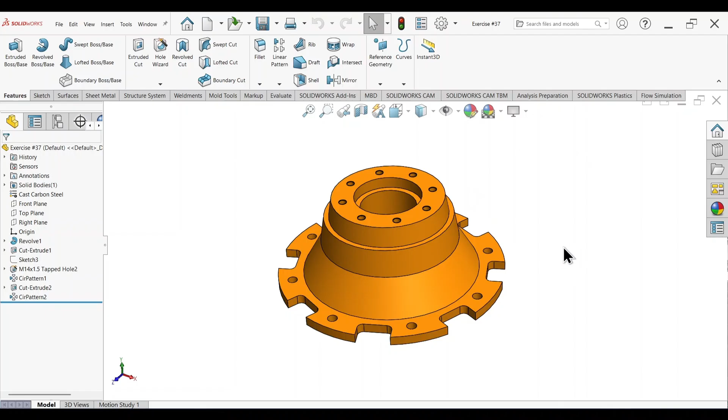Here we see the schematic drawing for exercise number 37. All dimensions are in millimeters. Here we see the isometric view, the top view, and the section view, taken along this horizontal line here, section AA. And we have a number of detail views, three in total.

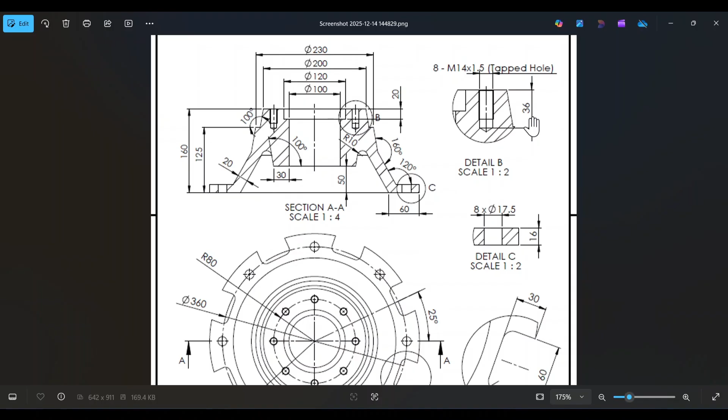For detail B, it showcases the details for the tapped hole at the top, showcasing all the dimensions. For detail C, we see the opening, or in fact the holes on the baseline of the component. And for detail D, it showcases the dimensions for this opening here at the bottom.

So we have a question here for this exercise, and it reads: what is the mass of this part in grams? It requires us to use ASTM A36 steel. By the end of this video, we're going to determine the mass of the part in grams. Before we actually determine the mass, and after designing the part according to the dimensions shown, we're going to have to assign a material of ASTM A36 steel.

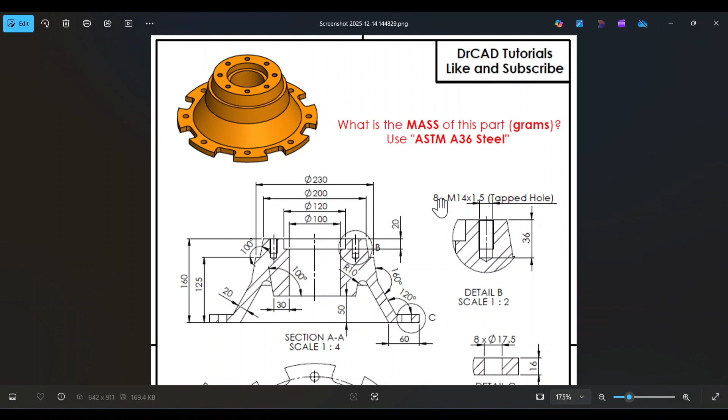So what are the main features for this component? Here we see that we have a base flange for this part. In addition, we have a central boss or hub. This central hub is both stepped and tapered, as shown here in the figure.

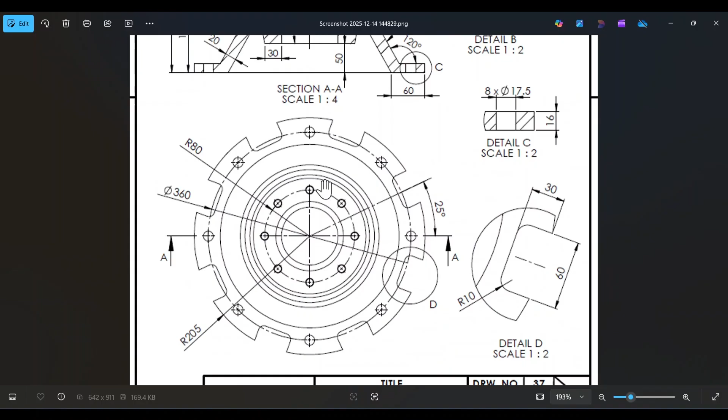We have 8 mounting holes. We can see this very clearly on the top view — 8 mounting holes on the base flange of the component. The dimensions for these mounting holes are showcased in detail C.

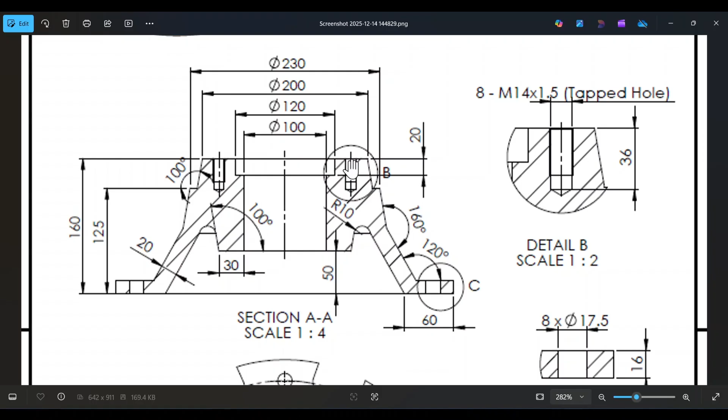And we have a section view, which is very important. To model this within SolidWorks, we're only going to use one 3D feature, and that is the Revolve Boss Base tool. So to model this very efficiently, we're going to sketch out the section profile. Since we have symmetry for the component along the y-axis, we're going to sketch out this profile right here using the line tool, and then fully define the sketch according to the dimensions shown. In drawing the sketch, we're automatically going to create the counterbore feature that runs along the center of the component.

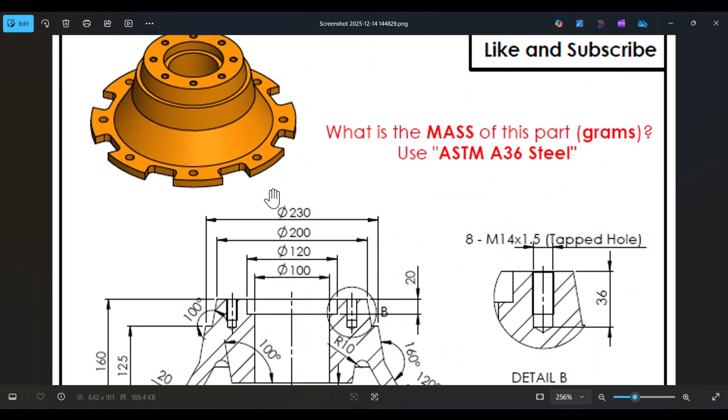After we sketch this profile and use the Revolve Boss Base tool to create the main body for the component, we're going to move on to the other steps, which is to create the mounting holes on the base flange, and we have to create these 8 tapped holes on the top surface of the component. For that, we're going to use the hole wizard in addition to the circular sketch pattern tool.

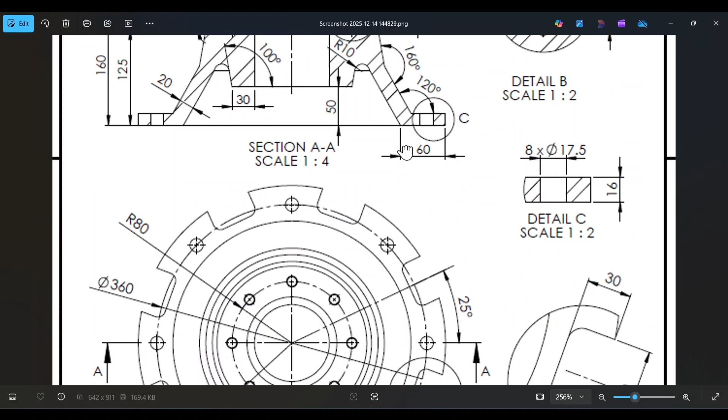Finally, we're going to work on creating this notch here, this opening, and for that we're only going to create one of it. We see here that this notch is situated on a center line that is 25 degrees with respect to the horizontal, and we have a number of dimensions here. So yeah, that's basically it.

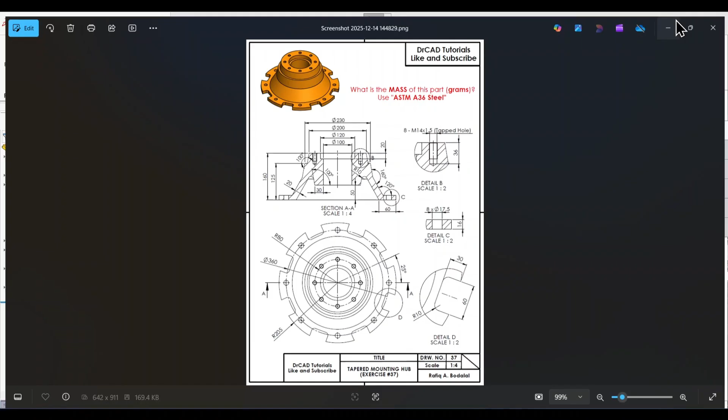So with that aside, let's get started with exercise number 37.

Okay, so let's start by creating a new SolidWorks part. We set the background to plain white, and we copy exercise number 37 into SolidWorks.

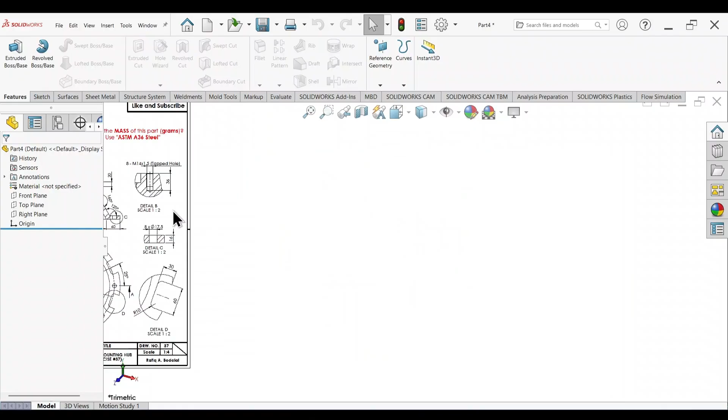As I said previously, the easiest way to model this within SolidWorks is to sketch out half of the section profile for the component, and then use the Revolve Boss Base tool to create the main body.

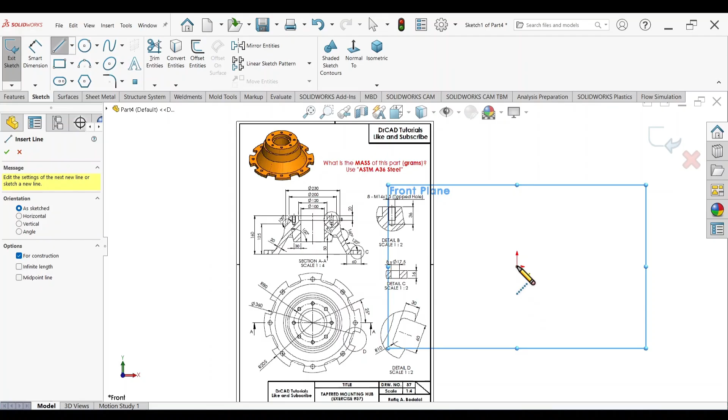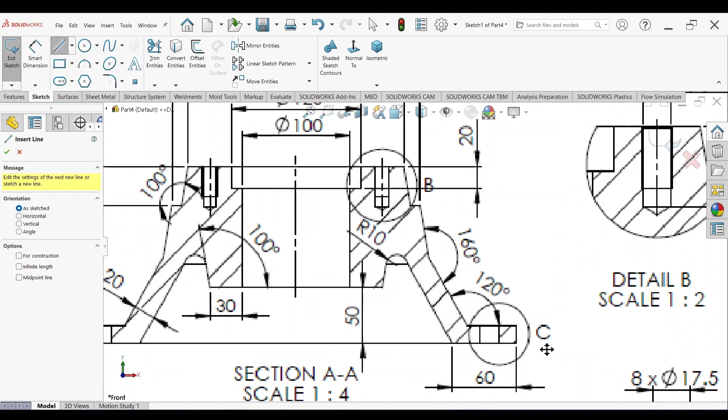Now what we need to do is select line and sketch out the profile, half of the section profile for the component. So let's go ahead and just sketch this out. I'm not doing anything fancy here, I'm just simply sketching out the lines here.

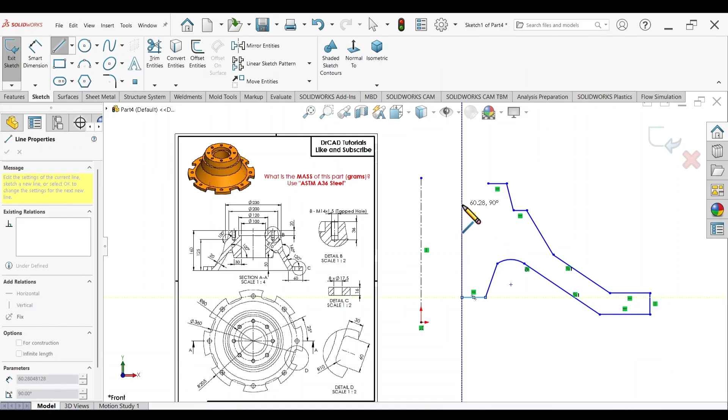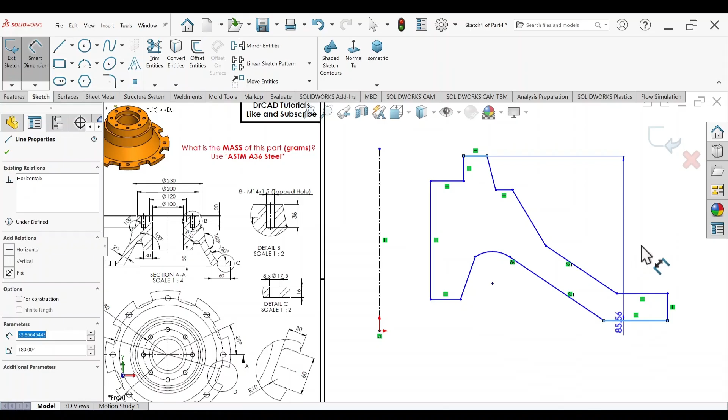Now we select Smart Dimension. Looking at the figure, the dimensions that define the sketch for the section profile show that the distance between this top edge and this bottom edge is 160 millimeters. Let's enlarge this image.

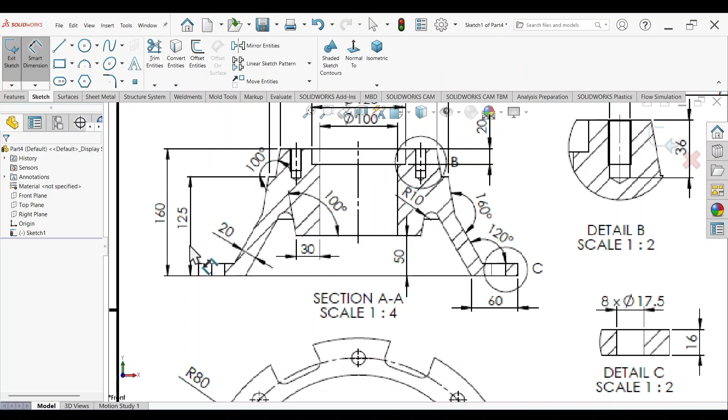Select Smart Dimension again. The distance between this edge and this bottom edge is 125. So the distance between this outer edge and this bottom edge should be 125.

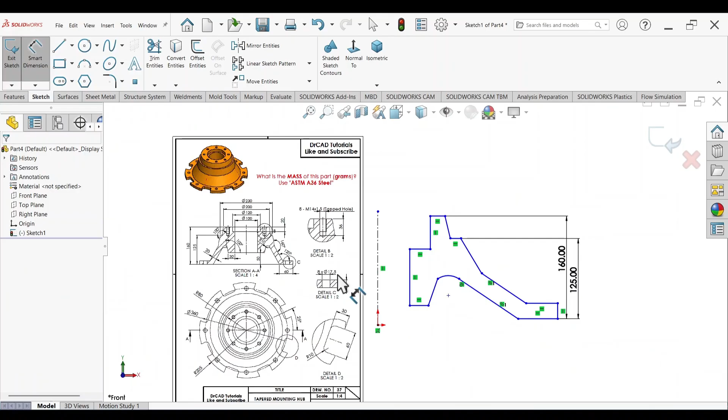Let's drag this downwards. Select Smart Dimension again, and the thickness of this edge should be 16. The distance between this line and this line should be 20 millimeters. The radius of the circle should be 10 millimeters. We need to drag this to the other side.

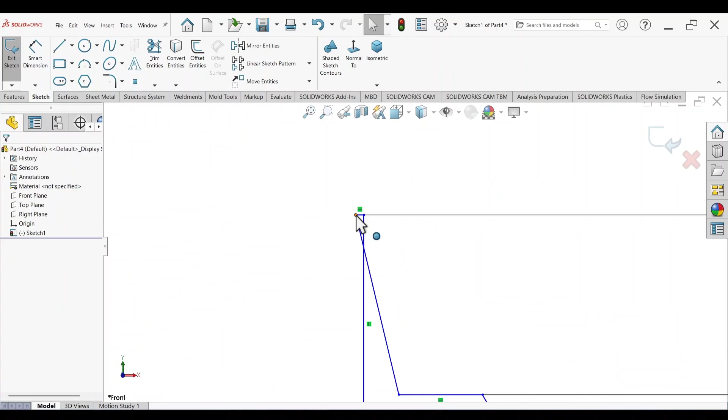Select Smart Dimension again and let's define certain angles. The angle between this line and this line is 160. The angle between this line and the horizontal is 120. So the angle between this line and this edge is 160 degrees, and the angle between this line and this line should be 120.

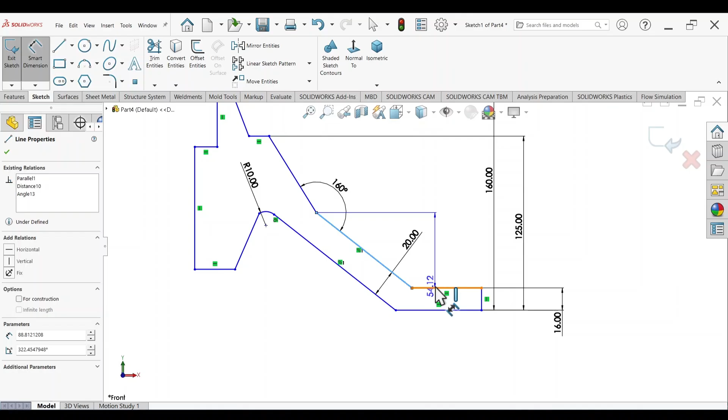Again, we need to drag out and fix certain features for the components. Now select Smart Dimension again, and the distance between this line and this bottom line should be 50.

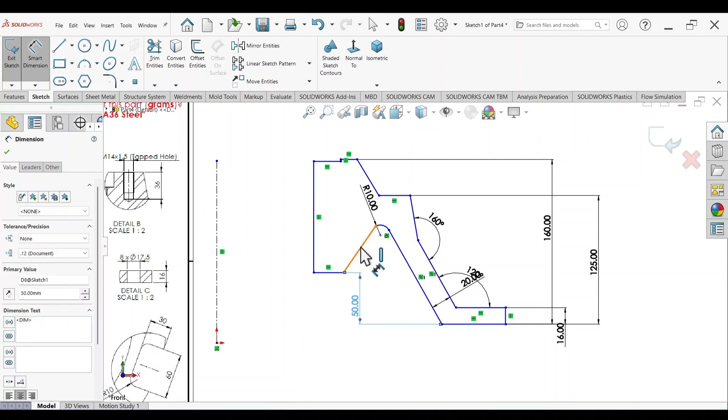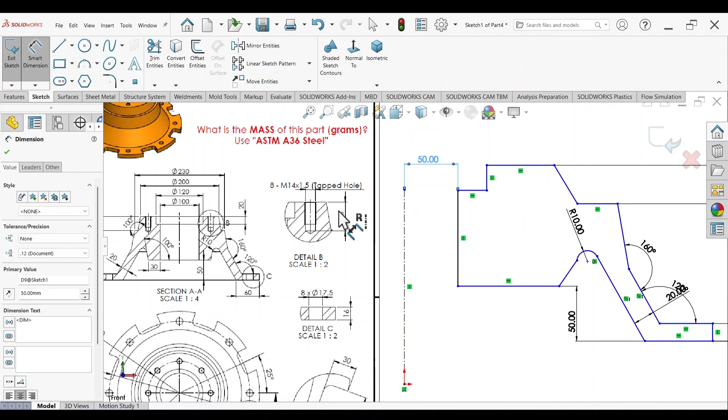Drag this upwards. It's important that we maintain the basic profile for the section view while defining it. The distance between this line and this line should be 50 millimeters. Likewise, the distance between this edge and this edge should be 60 millimeters.

The distance from this point to this point, half of it should be 100. So since it is 200, the distance between this edge and this point should be 200. Should be 100.

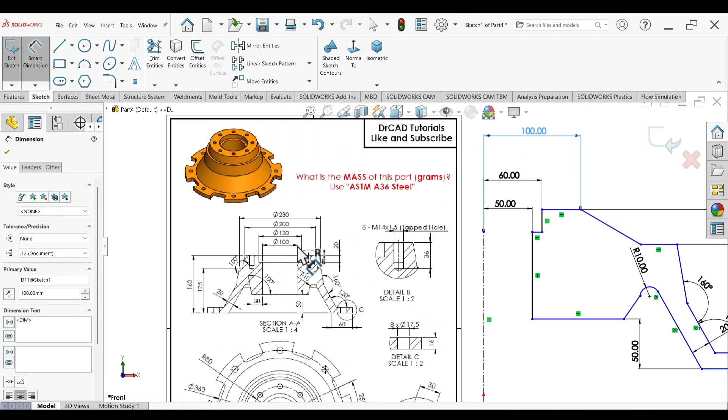And we have the final dimension between these two extreme points, 230. So the distance between this point and this point should be 230 divided by 2. Let's drag this here.

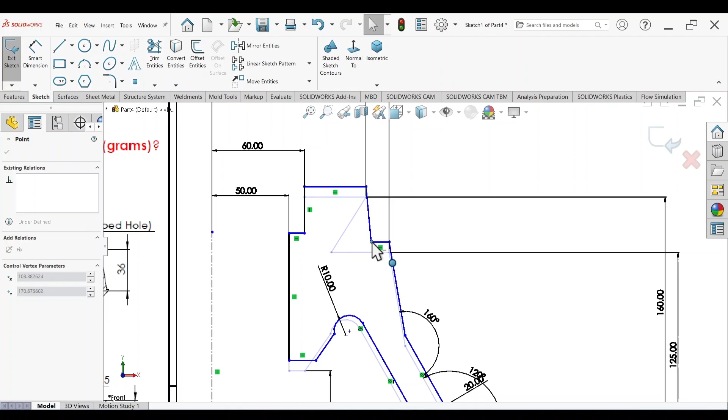Now select Smart Dimension tool again, and the length of this edge should be 30 millimeters. What else do we have? We have the distance between this edge and this edge, which should be 20 millimeters.

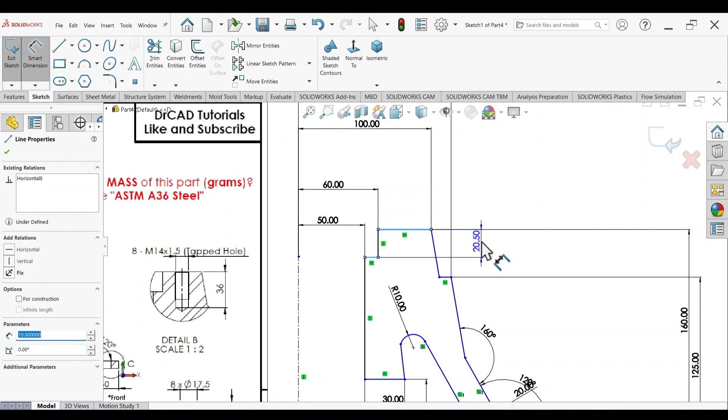And we have an angle between what and what? We have an angle of 100 degrees between this inclined line and the horizontal. So the angle between this edge and this horizontal edge should be 100 degrees.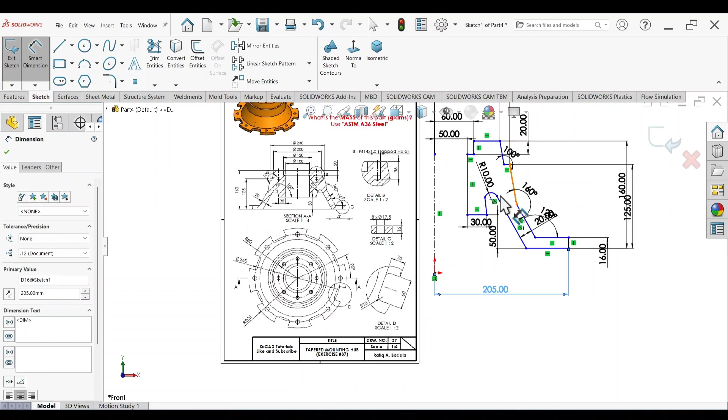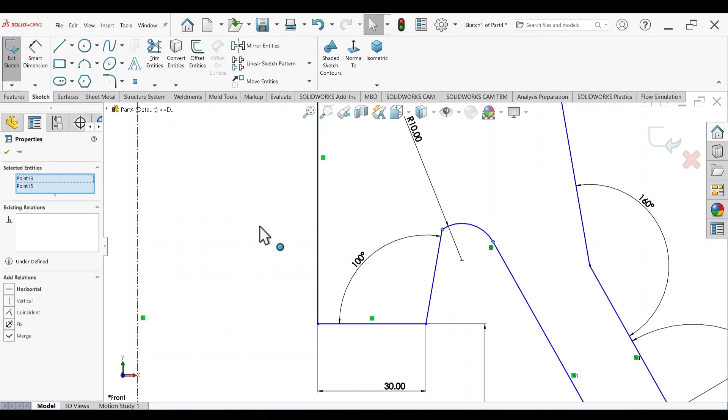Now we look at the drawing and see if we've missed any important dimensions. We have the angle between this line and this horizontal line as 100 degrees, and let's set the relation between this point and this point as horizontal.

Now I think we fully defined the sketch. Let's double check - we've used all of these dimensions. We've used 20, 160, and we need to define, select Smart Dimension again: the length of this edge should be 60 millimeters.

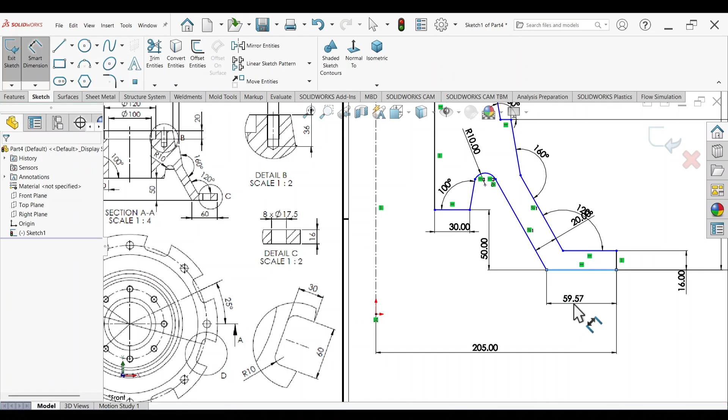The distance or length of this edge should be 60 millimeters. So we've used 50, 30, 100, 20, 125, 100. I think we've fully defined the sketch now. There's nothing left for us to do.

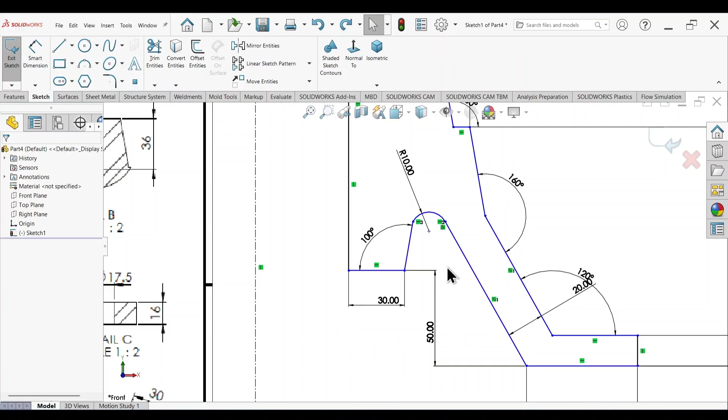Now we can move on to the next step, which is to go to Features, Revolve Boss Base. We see a preview for the Revolve Boss Base operation. Let's go ahead and select OK. This creates the main body for the component.

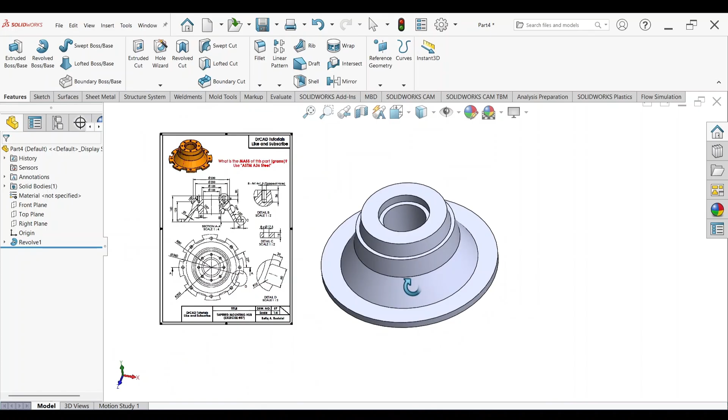Now we need to move on to creating the mounting holes on the base flange. Let's select this top face, Sketch, select Circle, and starting from the origin, draw one larger circle. This circle represents the pitch circle, helping us determine the position of the mounting holes. Select this circle and convert it into construction geometry.

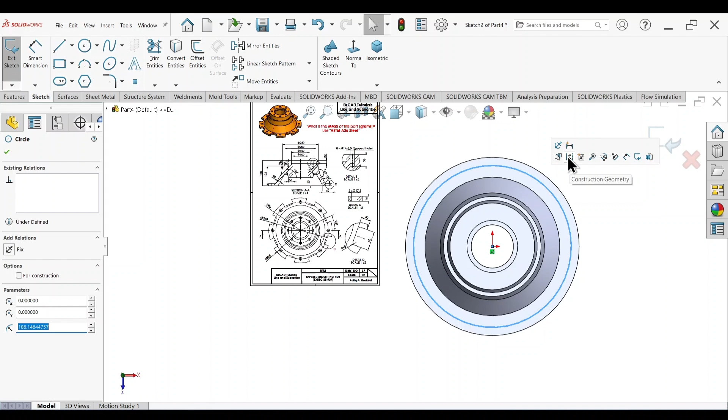Select Smart Dimension, and we see that this construction geometry should have a diameter of 340 millimeters. So the diameter of this circle should be 340 millimeters.

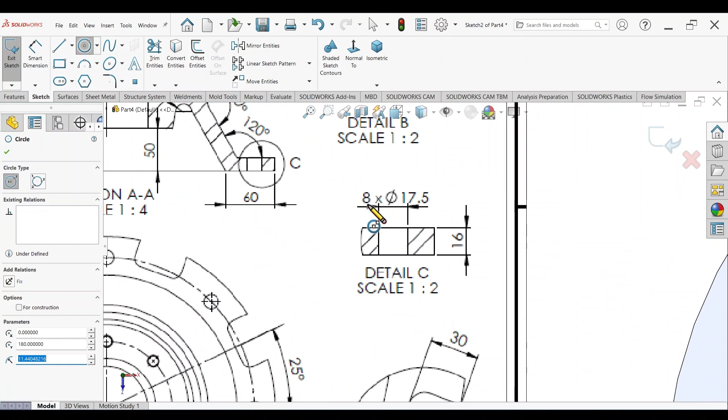Now select Circle again, and let's draw one of the mounting holes, starting from this top edge. We have a detailed view for the mounting holes - we have 8 of them. The diameter for each hole should be 17.5. Select Smart Dimension, and the diameter of this hole should be 17.5. Now select Circular Sketch Pattern Tool.

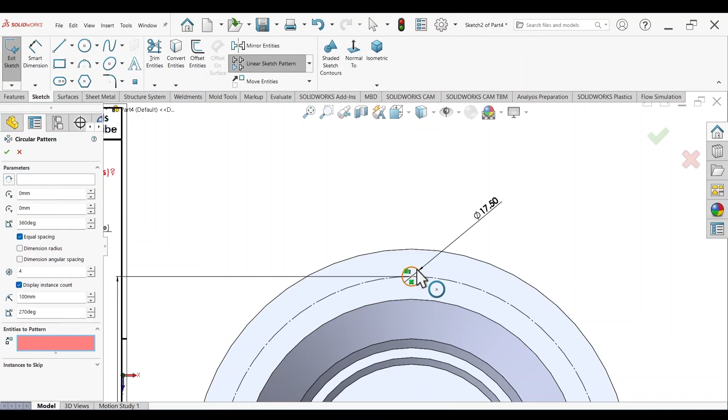For the entities to pattern, select this circle. By default, the number of copies is set to 4, but we need 8, so let's change that to 8, then select OK. Now press S on your keyboard, select Extrude Cut, and we're going to cut these 8 profiles all the way to the other side of the component, then select OK. That creates the 8 mounting holes on the base flange.

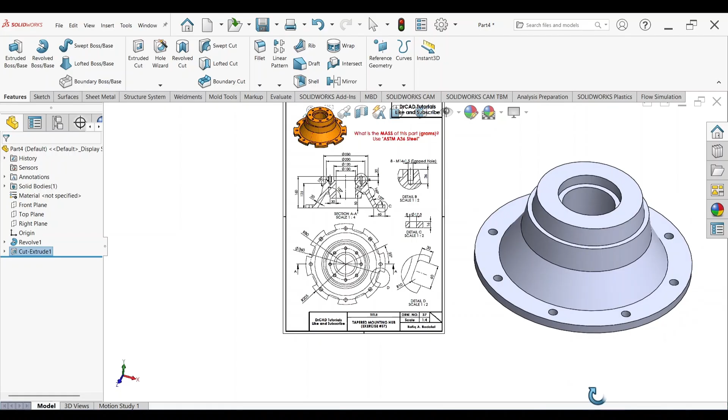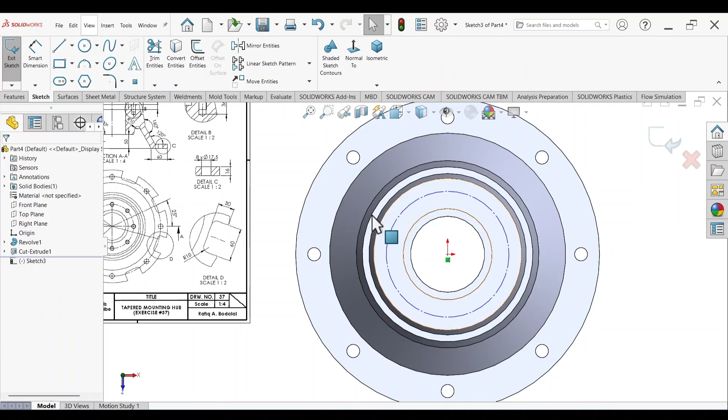Now we're going to create the tapped holes on the top face here. Select this top face, Sketch, and let's draw the pitch circle to situate the tapped holes. Starting from the origin, let's draw a circle. Let's convert this circle into construction geometry and define the diameter of the circle. From the figure, we see it should have a radius of 80 millimeters, so that corresponds to a diameter of 160 millimeters.

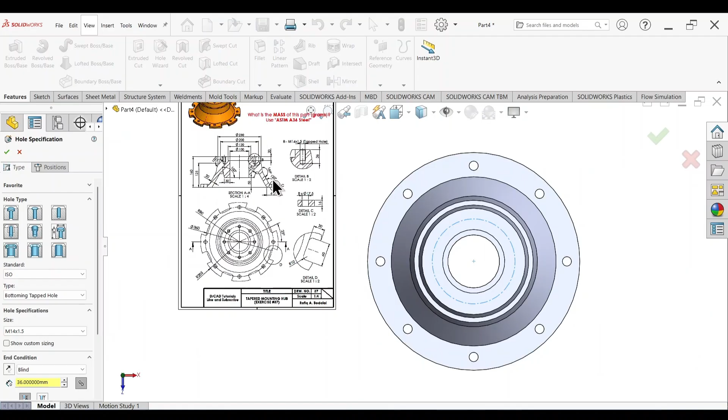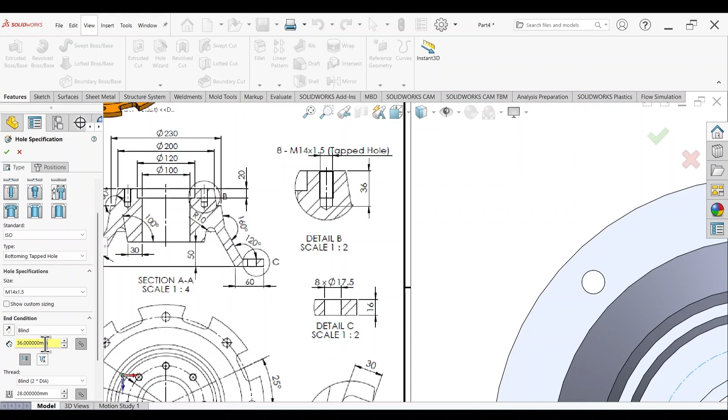Now go to Features, Exit Sketch, select Hole Wizard. Here we see a detailed view showcasing all the necessary dimensions for this tapped hole. So the type of hole we should select is a tapped hole, the straight tapped hole right here, and we're going to use the ISO standard. We're going to set the size for this hole as M14 by 1.5, so this should have a pitch of 1.5 millimeters. Now we need to define the depth of this hole as 36 millimeters, as indicated right here.

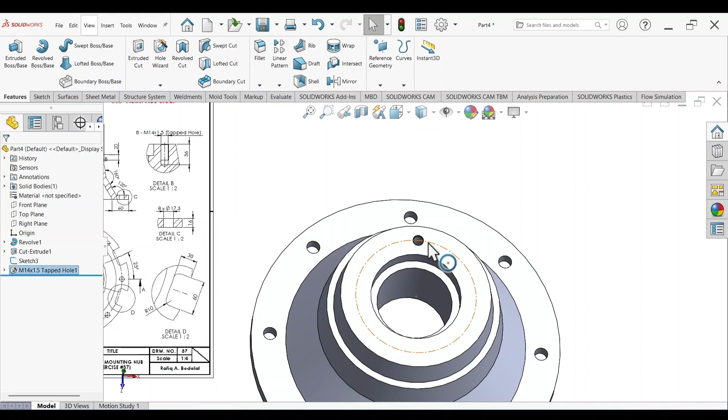Now go to Positions, and then select this top face. We're just going to position this circle right here on this point, then select OK. That creates one of the tapped holes on this top surface. We need to repeat this now 7 times, right? In total there are 8, but there needs to be 7 other copies.

Let's go to Linear Pattern here and select Circular Pattern. It's going to ask you for the direction for this circular pattern. Go ahead and select this outer edge, and by default it's already set to 8, then select OK. Now let's select this line and select Hide. We don't need this line anymore.

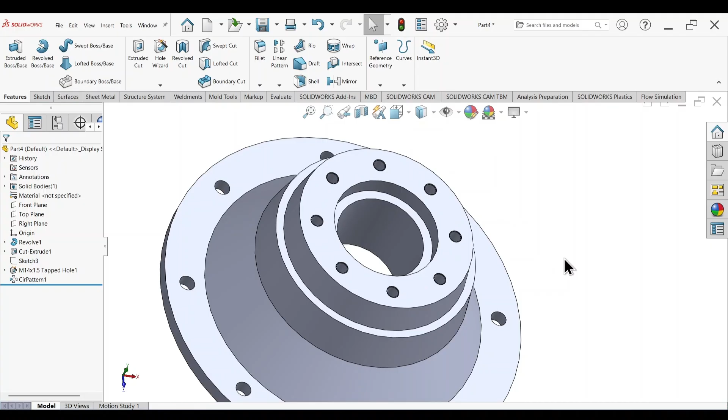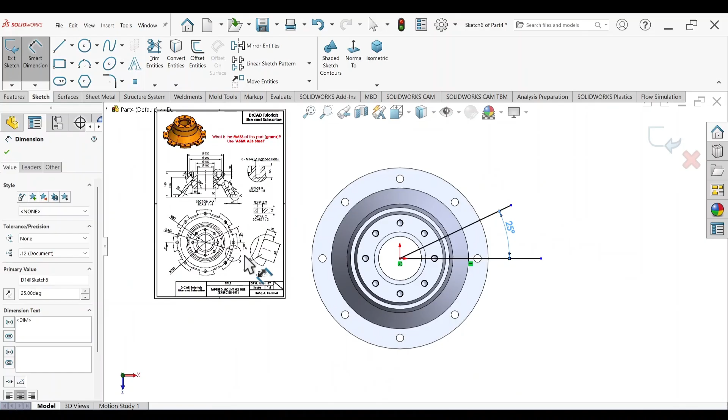Okay, so now we're almost done. We just need to create this notch or opening on the base plate. Select this face, Sketch, select Line, and we're going to draw 2 lines: one horizontal line starting from the origin, and another inclined line at any angle like this. We need to define the angle between these 2 lines as 25 degrees. These 2 lines will help us draw out the profile for one of the notches, and we see the angle is situated at approximately 25 degrees with respect to the horizontal.

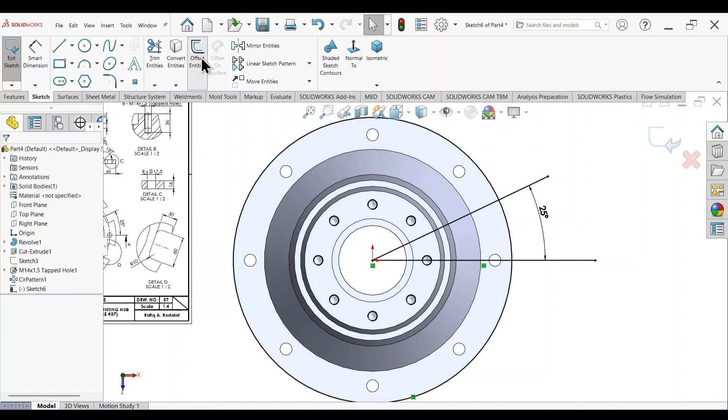What we need to do is simply select this top face and then select Convert Entities, and that will create a solid sketch out of the circumference of this larger circle. Now let's select Offset Entities, and we're going to offset this inclined line at a distance of 30 millimeters in each direction. Select 30 and select bidirectional, go ahead and select this line, then select OK. Select Trim Entities and delete any extra lines that you don't need.

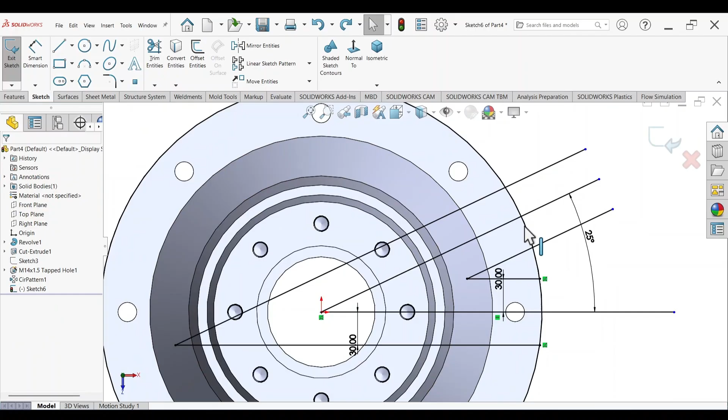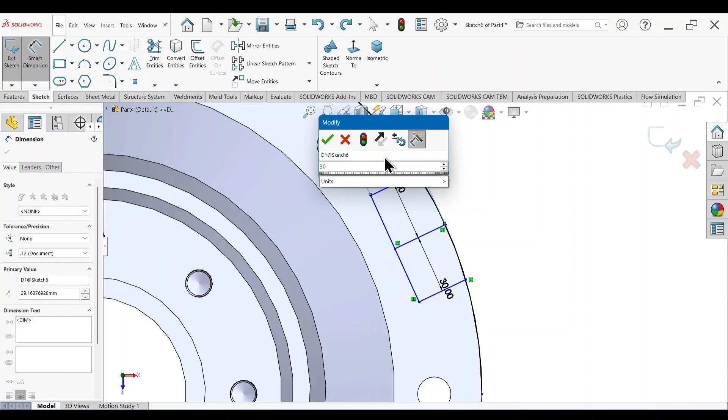So we need this line. Now let's draw a line starting from this point to this point. Select Trim Entities and delete any extra points that you don't need. Let's delete this partitioning line. Select Smart Dimension, and set the distance between this line and this point right here as 30 millimeters. Now select Trim Entities and delete this partitioning line here. Click OK. That creates the profile for the notch here.

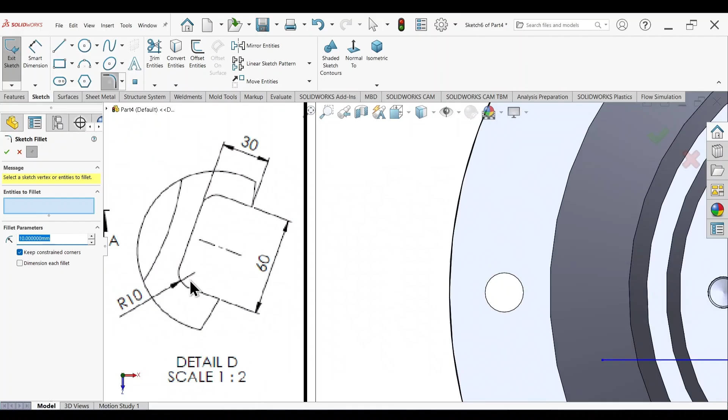Now we just need to fillet certain edges. Use the fillet tool, and from the figure here we have a fillet radius of 10 millimeters for each of these two vertices, vertex 1 and 2, then select OK. Now press S on your keyboard, Extrude Cut, select this sketch right here.

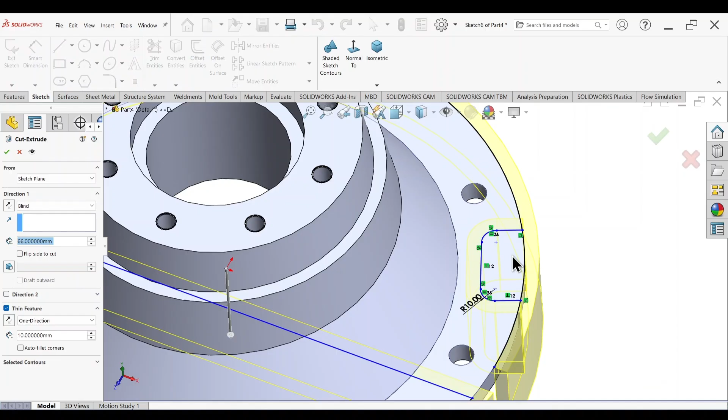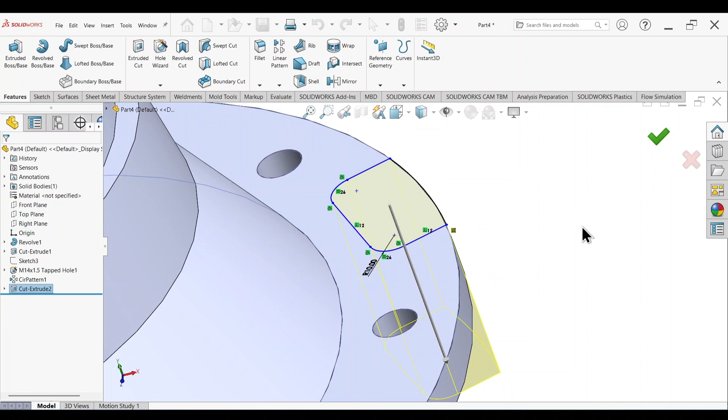Let's just delete this line right here, go normal, let's delete this line. Trim Entities and delete any extra lines here. Press S on your keyboard, Extrude Cut, and by default it already selected the profile that we just created, then select OK. That creates one of the openings for the base plate.

To repeat that, simply select Linear Pattern and then select Circular Pattern right here. It's going to ask us for the direction, select this outer rim, and set the copies as 8. We can see a preview right here, then select OK.

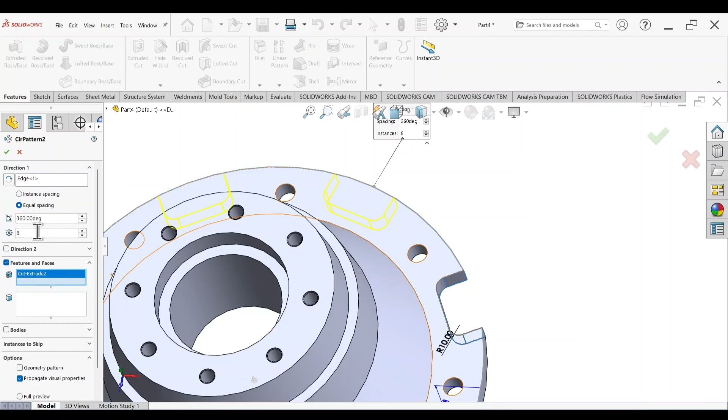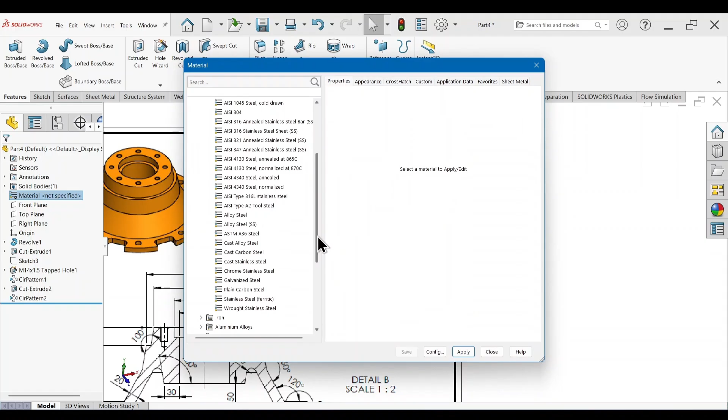Now we need to define the material for this component. Again, we need to answer the question: what is the mass of this part in grams? So we go here, right-click, Edit Material, and we need to select ASTM A36 steel, this is the option right here. Apply, close. Let's delete this edge.

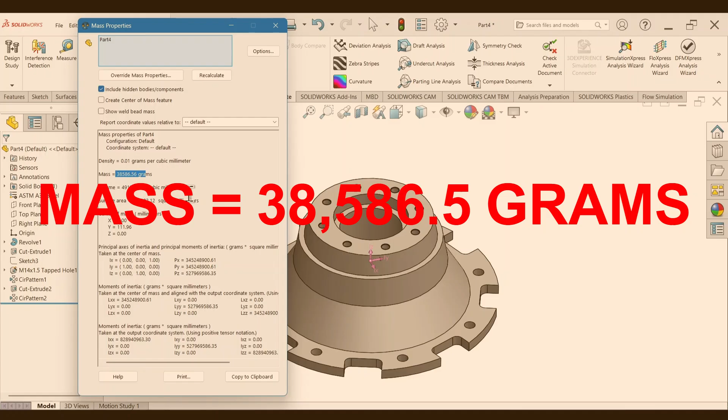Now let's determine the mass of this part. Go to the Evaluate tab, select Mass Properties, and here we have an answer of 38,586.5 grams. That is our final answer.